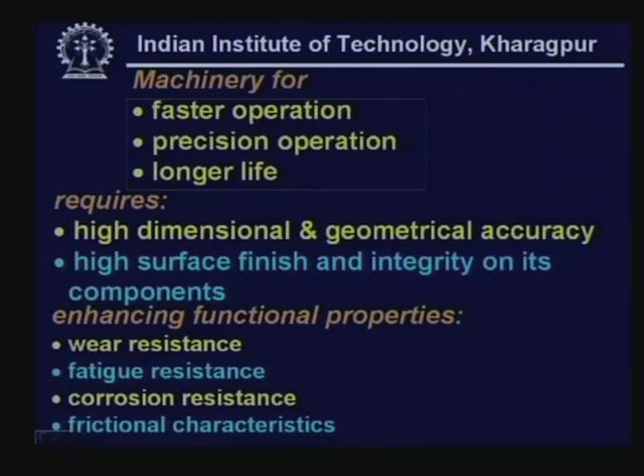To get this surface, the workpiece has to be processed, meaning removal of material in the form of chip. We know there are already existing processes like turning, shaping, milling, and grinding. Unfortunately, this stringent requirement of ultimate accuracy on dimension or profile, or very high level of finish, or enhanced surface integrity, just cannot be achieved by following these aforesaid processes.

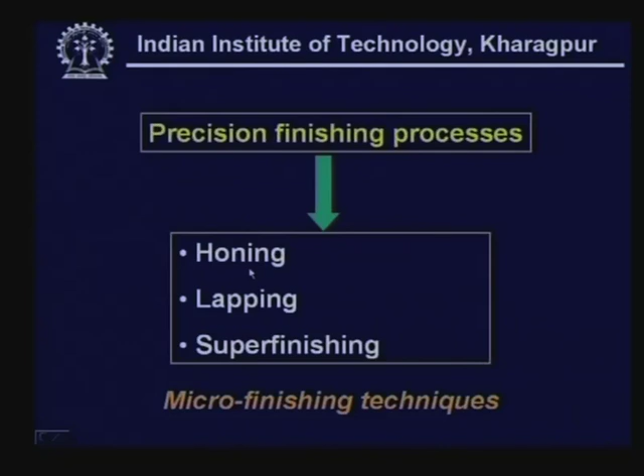That's why precision finishing processes came into being, which include honing, lapping, and superfinishing. These three, honing, lapping, and superfinishing, are also called the system of microfinishing techniques.

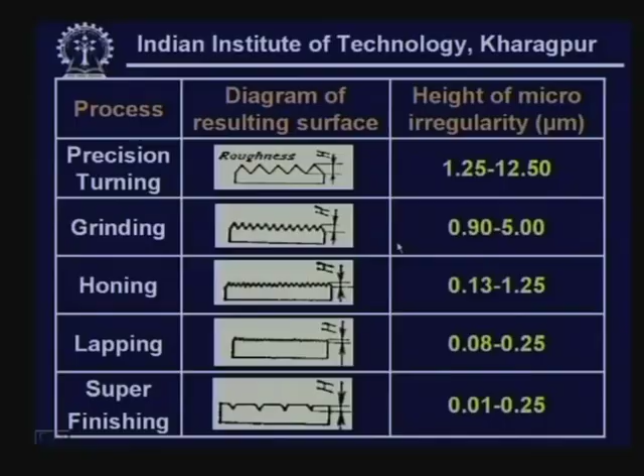Now, to have that, first comes the honing process.

This is the schematic representation of a honing process. As we know, in any material removal process, there should be an interaction between the workpiece and the cutting tool. Here we use a workpiece and are interested in improving the surface quality of the internal surface, and for that a tool is preferred in the form of a honing head, which consists of a number of abrasive sticks fixed to it. These abrasive sticks come in the form of bonded abrasive.

Here we have various motions to perform the honing action. Primarily, the honing head should rotate, and in addition it should also reciprocate along the axis of the hole. As a result, the desired surface is obtained.

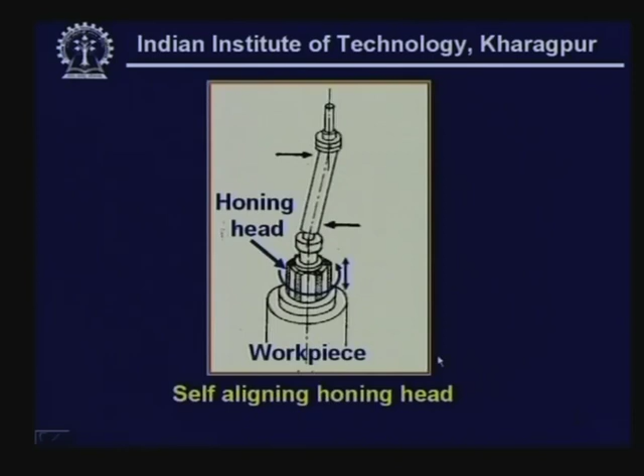Now, what are those characteristics of honing? It's basically a finishing or smoothing process.

The honing head has both rotary and reciprocating motion. This rotary motion is unidirectional. As a result, the track followed by the abrasive cutting points looks almost like a figure 8 - a closed loop travel path. The workpiece remains stationary with no movement, and bonded abrasive is used in this honing process.

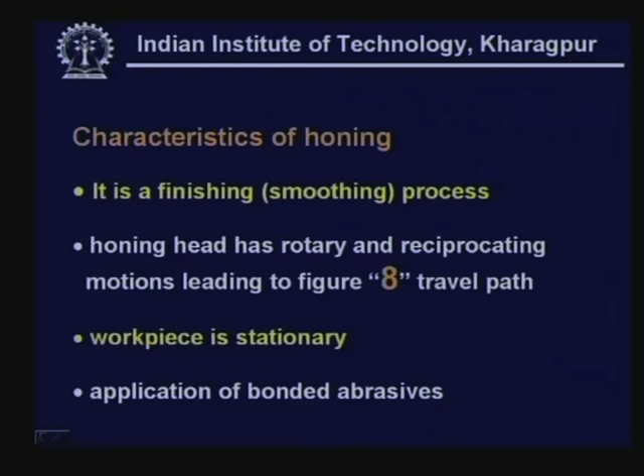Although we use abrasive grit, and it is an abrasive action, it is not similar to grinding - it's quite different from grinding. How? Let's look into this.

If we consider the grit density, at least 100 to 1000 times more grits are participating in this abrasive action in the honing head. Cutting speed is fairly low in honing, about 1/50th to 1/120th of the grinding speed. If we consider the cutting pressure required for chip formation, it's also 1/6 to 1/10 that of grinding. Considering these three characteristics makes it quite different from the grinding operation.

Now considering application, it's basically meant to improve the surface finish of a hole, and the size of the hole can range from 3 millimeters, which is quite low, to as high as 1000 millimeters.

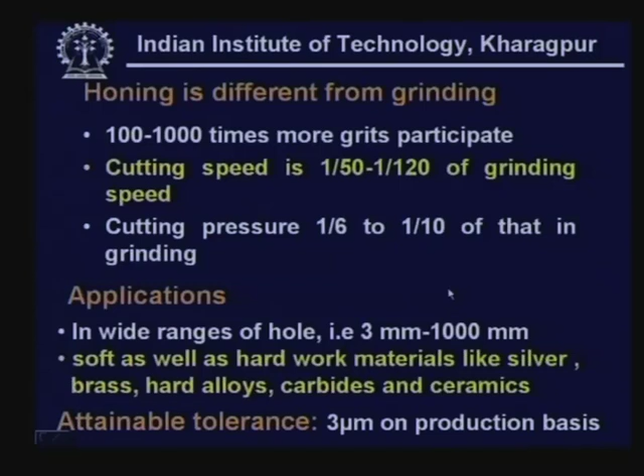Now the types of abrasive material play the most important role in this cutting action. Just like grinding, we have conventional abrasive and superabrasive, which can be readily used in making the abrasive stick, which constitutes the very vital element of the honing stone. On the conventional side we have aluminum oxide and silicon carbide, and on the superabrasive family, diamond and CBN. CBN is the new addition to this family.

Just like grinding, aluminum oxide is recommended for honing steel and ferrous material, and for non-ferrous material or non-metals in the softer range, silicon carbide can be recommended. Diamond is used for handling non-ferrous, very hard material where silicon carbide cannot be a good performing element.

CBN, as already said, is a new addition. With this CBN, hardened steel and various materials used for making components, such as alloy steels, can be very easily tackled.

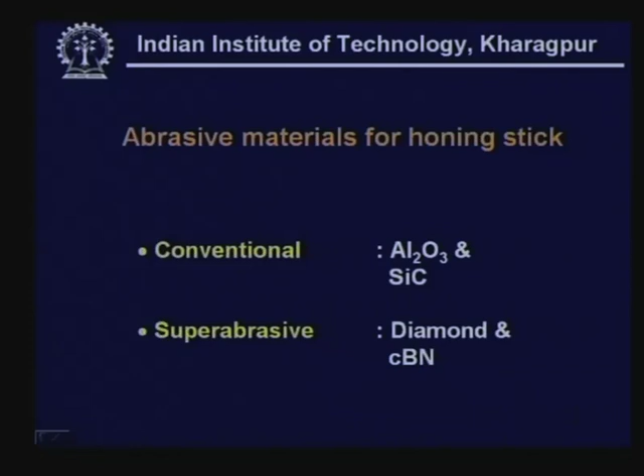Now here we see how the honing stick works within the hole. This is the initial position of the honing stick, and this is the final position over which it's reciprocating. So the stroke length has to be determined correctly.

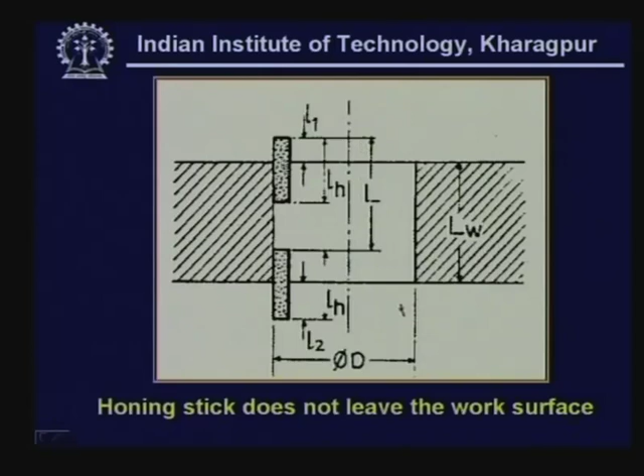One thing to note is that the honing stick should never leave the workpiece, either during the forward stroke or the reverse upward stroke. There should always be some overlapping or contact, and to achieve this properly, we have to consider the length of the stick, the length of the hole, and the overlap on the upper and lower sides. Considering all these parameters, the stroke length of the honing stick is determined.

Here we see clearly the path followed by the honing stone. It has a unidirectional rotation but a continuous reciprocating motion, producing a figure-8-like pattern on the hole made by previous processes, giving cross-hatch marks. These steps, determined by this offset and overlapping cuts, allow an improved surface finish to be effectively obtained in this honing process.

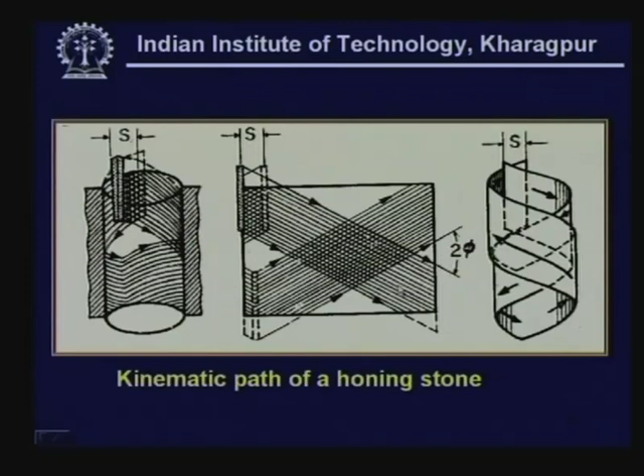Now we go to the operational parameters of honing. We find at least two parameters in honing. One is the peripheral honing speed of the honing stone, another is the unit pressure exerted on the surface to be honed. These are the two important parameters deciding the outcome.

What is our goal? At least we have two goals: one is the material removal rate, another more important one is the level of surface quality we can achieve from this honing process. We have to see the influence of this unit pressure and the peripheral velocity of the honing stick. Let us look into this graph.

Pressure along this axis, and we have material removal rate and also the surface roughness which develops because of this honing action. With the increase of pressure, we can increase the material removal rate. But over a certain range of pressure, the surface roughness is almost steady, and after that it takes a rise, a rising curve like this.

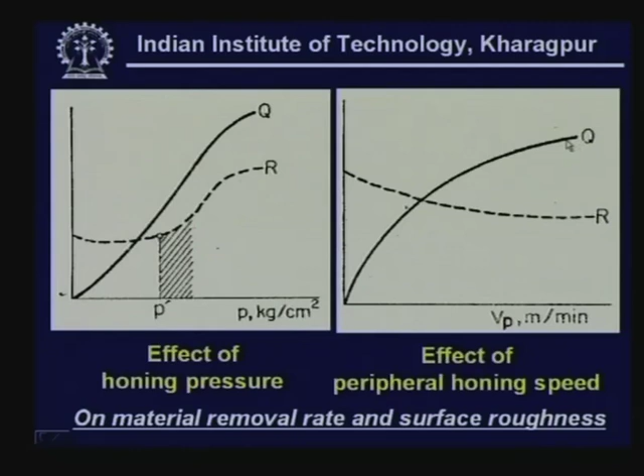If we go to the right hand side of this diagram, this shows the variation of material removal rate, and the dotted line shows the roughness. With increase of peripheral velocity, material removal rate can be increased, and we can also reduce the surface roughness. That means if this speed is permitted by the machine and its system, then by just increasing the speed we can achieve some improvement in surface finish - lowering of the surface roughness and increase of the material removal rate.

Now we have another parameter represented by tau, that means the honing time, which is very much connected with productivity. If we prolong this honing time, the material removal rate decreases for a constant unit pressure. This may be because of the dulling action of the grits - it gradually loses its cutting capability, and that's why it has a falling trend.

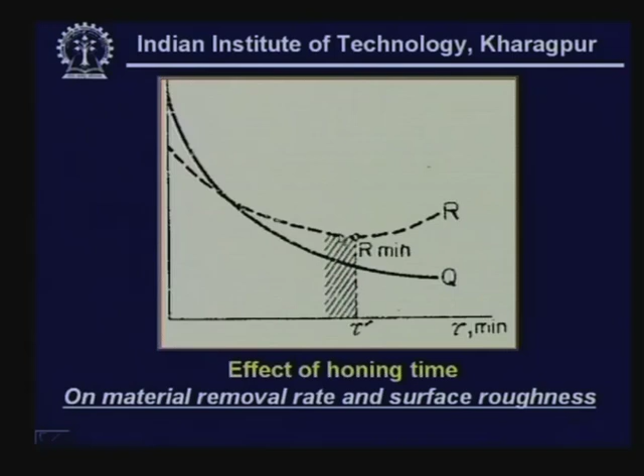But here we can find a minimum value of surface roughness, and then again it has an increasing trend. So we can say our goal is to achieve the desirable surface roughness, and we can leave it here - this should be the preferred honing time which satisfies the need of achieving the surface roughness.

Now, the honing we have discussed so far is multi-pass honing, meaning the tool is supposed to reciprocate for quite a number of times. But here we see a quite new type of honing stick. What we discussed so far is a bonded abrasive, but this is a composite structured bonded abrasive, meaning the abrasive grain and the bonding material make a composite structure. But the figure we see here is a special type of honing stick.

It is very similar to a single layer grinding wheel. Here the grits are formed in the configuration of a single layer which is bonded or embedded in a galvanic layer. What we achieve here is larger chip clearance space, and this honing stick can be safely used with increased material removal rate, which is not possible with a bonded stick having a composite structure. With such material we can go for higher material removal rate.

Following this idea, attempts can also be made to have a superabrasive honing stick with a single layer configuration, but here we can replace this galvanic bond with a brazed bond, because we already know that this brazed bond has a chemical attachment with the grit, and this brazed bond can provide much more chip clearance space, which reduces the risk of chip clogging during honing.

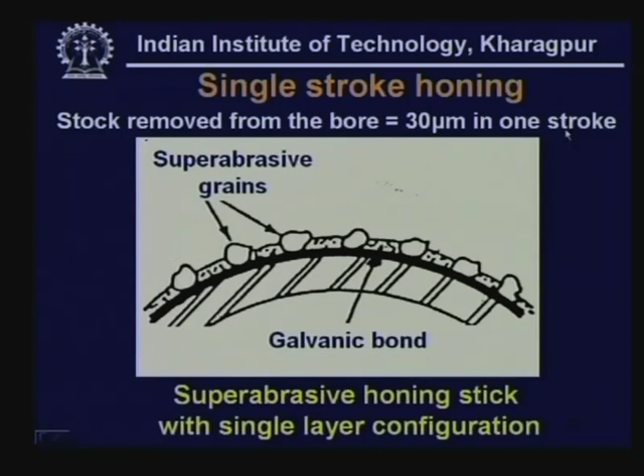So as we can see here, this honing stone can be used for high stock removal rate. For example, a 30 micron stock can be removed from a bore in one stroke. So this type of stick is used for single stroke operation.

Now we go to the lapping process. What we see here, instead of a bonded abrasive, loose abrasive are used. In honing we used bonded abrasive, but in lapping loose abrasive. These loose abrasives are carried by a vehicle which is in the form of oil or grease. They have momentary support from a top surface which is a piece of metal usually made of cast iron.

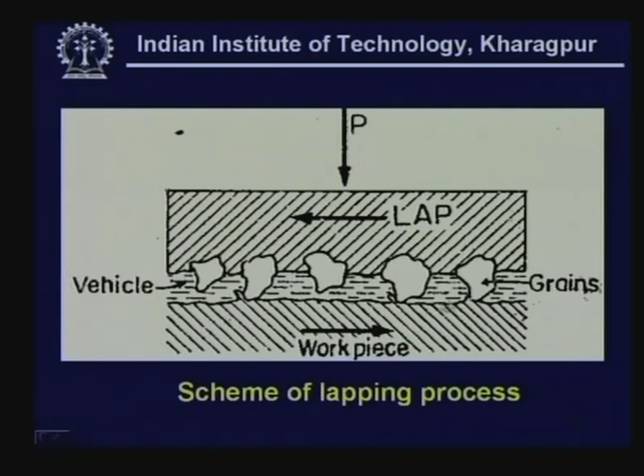What we see here is the workpiece which needs further improvement so far as surface quality is concerned. These grains are working like sharp cutting points, getting momentary support from the lap, which is the top component, a cast iron block. A pressure is exerted, and these grits are very active in forming tiny chips, getting the right surface finish on this workpiece.

So if we summarize the characteristics of the lapping process: number one, the use of loose abrasive between the lap and the workpiece. Then, the lap and workpiece are not positively driven. The relative motion between the lap and the workpiece changes continuously because they are not positively driven.

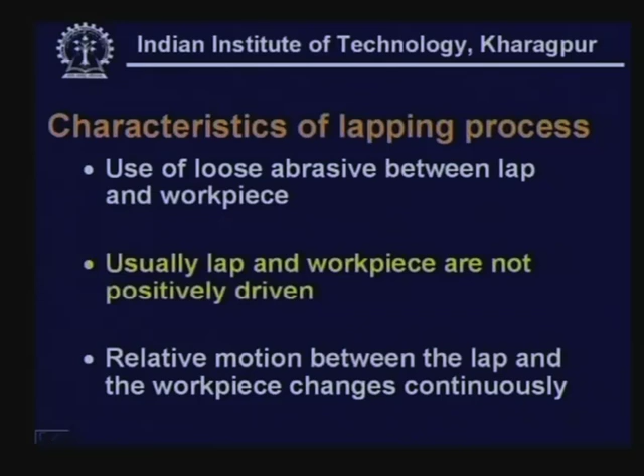So we have reviewed the characteristics of the lapping process. Then comes the abrasive used in this lapping operation. It is also an abrasive process using loose abrasive material. Here we can see aluminum oxide and silicon carbide - these are the two commonly used lapping materials.

Then what is added? Chromium oxide with finer grit size can also be used. Boron carbide, which cannot be used in any grinding operation or grinding wheel, can be effectively used in this lapping operation - the grain size is a little higher. Finally, we can also use diamond with a very fine grain size. So aluminum oxide, silicon carbide, chromium oxide, boron carbide and diamond - these are the usually used grit materials.

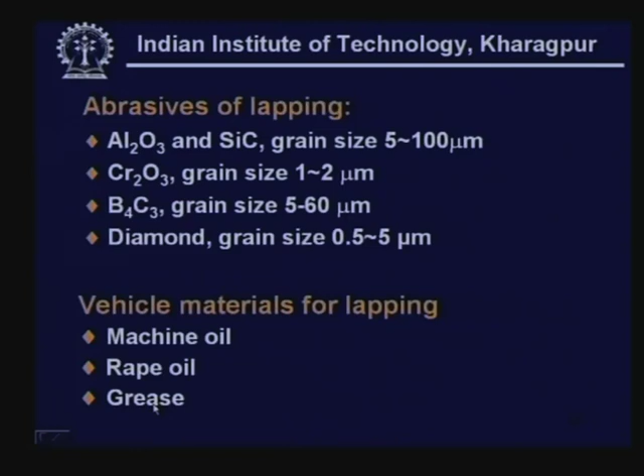Then the vehicle materials: machine oil, rapeseed oil and grease. These are the three materials which act like a transporter or carrier of these abrasive materials.

Here some illustrations are given of how lapping is conducted. There are actually two types of lapping: one is called manual lapping, another is called machine lapping. In manual lapping, what we can see is an example of external lapping of an external cylindrical surface, like a shaft.

This shaft can be held in a lathe and provided with the necessary rotary motion. Then a piece in the form of a bush comes and is fitted with this rotating cylindrical piece which needs lapping. In between this cylindrical ring and the solid piece to be lapped is added the lapping material. Now the pressure can be adjusted - what is known as the lapping pressure. To have the proper lapping action, there is an adjusting screw which can be tightened to achieve proper lapping pressure around this cylindrical surface.

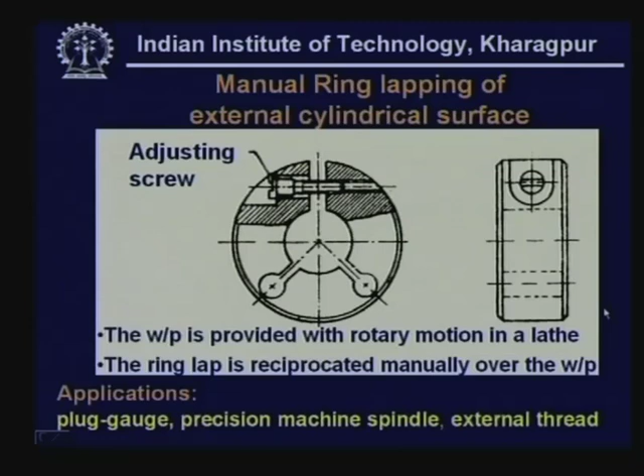Now we go to the internal cylindrical surface, like a bush or a liner, which also needs lapping. In this case, a mandrel is taken which serves as a lap - a solid piece which is held in a lathe and provided with the necessary rotation. This tube or sleeve, which needs lapping on the internal surface, is reciprocated manually over this mandrel along the axis, and in between, the lapping material or lapping medium is provided. This is how manual lapping of an internal surface is conducted.

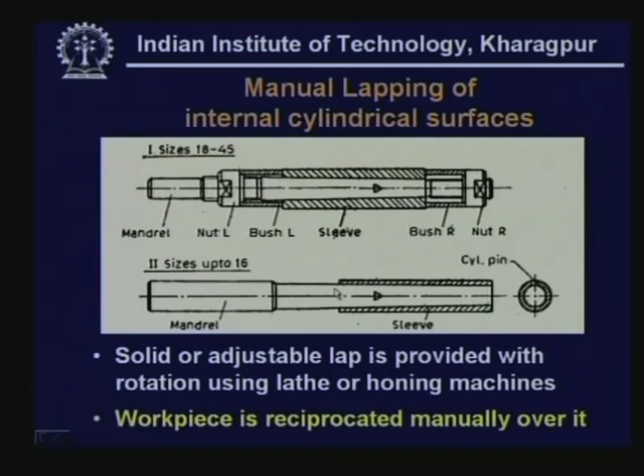We also have machine lapping. Now, when we have a large number of workpieces or a large amount of material to be removed, manual lapping becomes a tedious job. Then one has to go for machine lapping with the help of a machine, and this machine lapping facilitates economic production of the material by lapping.

Now, here what we can use is either loose abrasive, as has been already illustrated, with a suitable vehicle, or a bonded abrasive which is bonded onto a suitable plate, in the form of a plate or in certain other form, that can also be used.

Now, in this lapping machine family we have a classification. Machines which use a cast iron or a bonded abrasive circular plate - it can be a cast iron block which uses loose abrasive, or it can be a bonded abrasive circular plate used for either lapping a flat surface or a cylindrical surface. This is one category of the machine.

Now, for lapping cylindrical surfaces, we can use another type of machine which does not need any center support - this is centerless lapping, very similar to centerless grinding, and it is specifically meant for lapping of cylindrical surfaces. We have the third type which is meant for lapping internal surfaces, very similar to honing machines. So these are the three types of machines used in lapping.

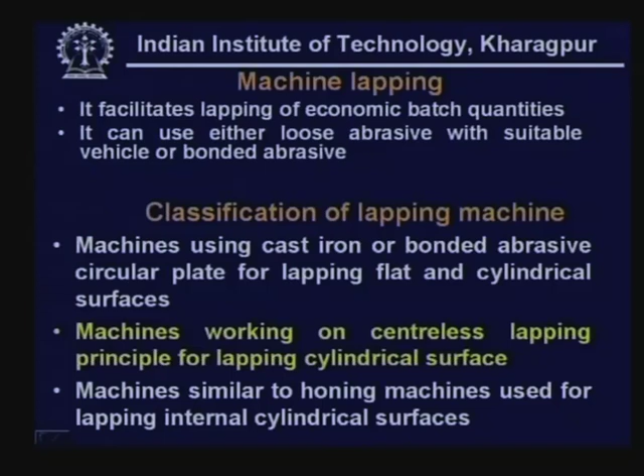This is an illustration where a lapping machine is used for production of either flat or cylindrical surfaces. The workpieces are put on this table support which is rotating; the lap, provided at the top, can be fitted with bonded abrasive and is also rotating. Now this should be correctly positioned to give the required pressure, and this pressure can be precisely controlled to achieve proper lapping action. So this is how flat surfaces can be lapped.

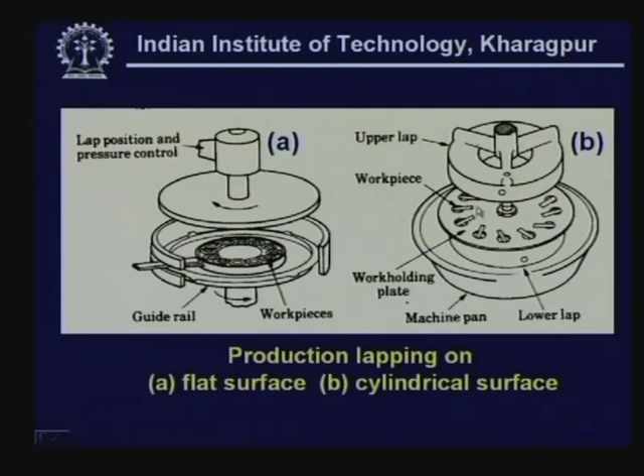A similar principle can also be used in another machine dedicated to lapping cylindrical pieces. Here too we have the work holding plate, the lower lap, the machine pan where debris will be collected, and the upper lap which does the necessary lapping. Here also a bonded abrasive plate at the bottom can be used to lap the cylindrical surface.

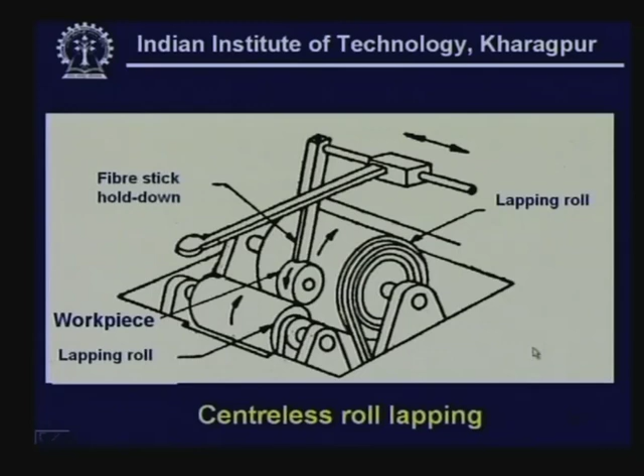Now we have to also look into the technical parameters affecting the lapping process. At least we can identify the unit pressure, just like the unit pressure which is a very important process parameter in honing. Then the grain size of the abrasives participating in this lapping action, the concentration of abrasive in the vehicle - for example, in a unit volume, how much volume is occupied by this abrasive grit - and ultimately the lapping speed. So these are the four process parameters controlling the lapping process.

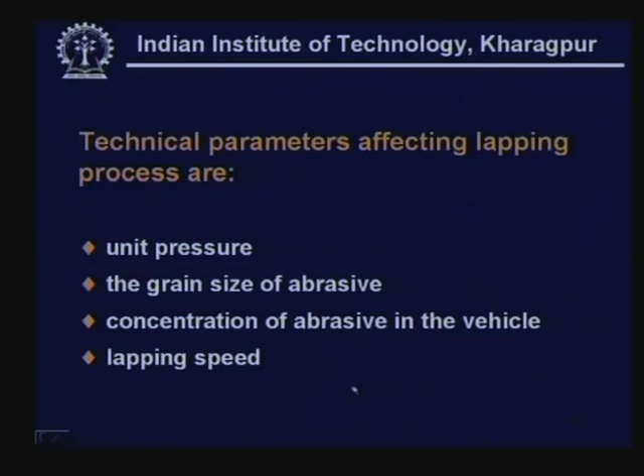So at least we can find there is some effect of this abrasive content in the vehicle, which is expressed in the form of percentage - that means how much abrasive material is contained in the vehicle - and on the axis we have material removal rate, which is also of interest. We have seen three pressures P1, P2, P3, and suppose it is P1. With this constant P1 value, as abrasive content changes, we can easily see that material removal rate is gradually increasing and then has a falling trend. Now if we change the pressure, the whole curve can shift and change its position.

If we go to another pressure, we can see that it also has certain variation. What is interesting is that for each pressure we can have a maximum material removal rate, which is not constant for all pressures. So for P1 here we have the peak, and for P3 the peak is indicated here. Now if we consider all three pressures, we find P2 is the best one, the pressure which should be chosen, and this corresponds to a particular abrasive content which is not the same for P3 or P1.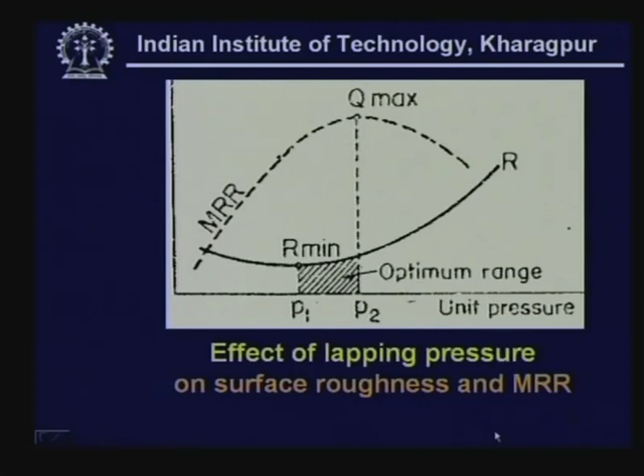With increase of grain size, this continuously increases, just like any abrasive process. However, the material removal rate has a rising tendency, and after attaining a maximum it has a falling trend.

But from the requirement of achieving the surface roughness that satisfies the quality needs of the component to be machined or produced, there is a fixed surface roughness, fixed considering the effective functioning of the component. There we cannot make any compromise.

So this is the value which is fixed. With this value we have to choose the grain size, the best possible grain size where we can have the right value of surface roughness.

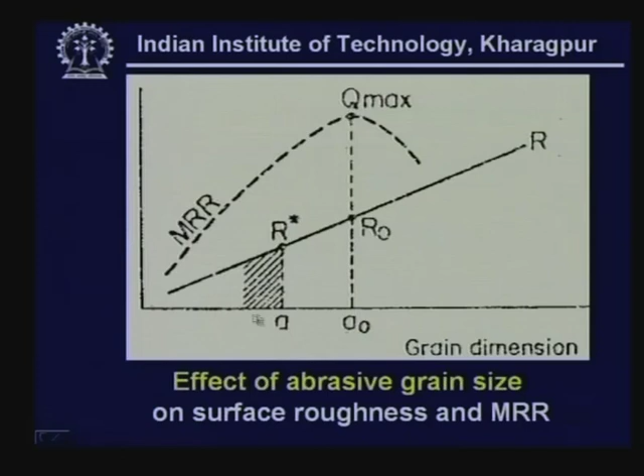But if any adjustment or flexibility is allowed, so that we can let the surface roughness increase to attain the highest value of material removal rate, then perhaps we can go to a higher grain size.

Then comes the lapping time, its influence on material removal rate and surface roughness. As we know, since the abrasive grits are being used continuously, they will show dullness, loss of sharpness, and with the same constant pressure, the material removal rate will fall because of the loss of cutting capability.

But this also enhances surface finish, or reduces surface roughness. Both can be achieved by prolonging the lapping action over a period of time.

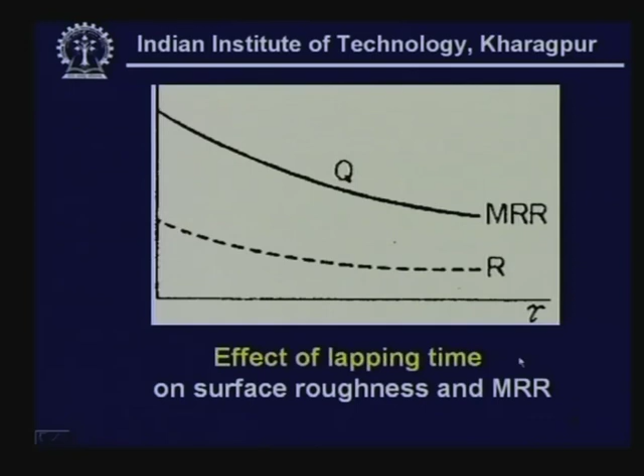Now we have to choose the lapping time. There are two important issues. One is L. What is L? L is actually the linear loss of dimension, which also has a fixed value, what we can consider as the allowance.

Gradually, as lapping continues, material is removed and there is a loss of material. This loss has a limited value; we cannot go beyond that. At the same time, we have to achieve the fixed surface roughness.

If we can achieve the surface roughness at a time tau r well before reaching the limit in terms of this allowance, then we choose tau r as the criteria for choosing the lapping time. It can be the other way: it may so happen that a very low roughness value is chosen, and this cannot be achieved over a reasonable period of time, and it takes quite longer.

We can compare these two curves. Here the lapping time is longer to achieve a lower value of surface roughness, but this LP, that is the permissible limit on the material loss, we cannot go beyond that point. So this tau r cannot be allowed, lapping cannot be allowed over this tau r.

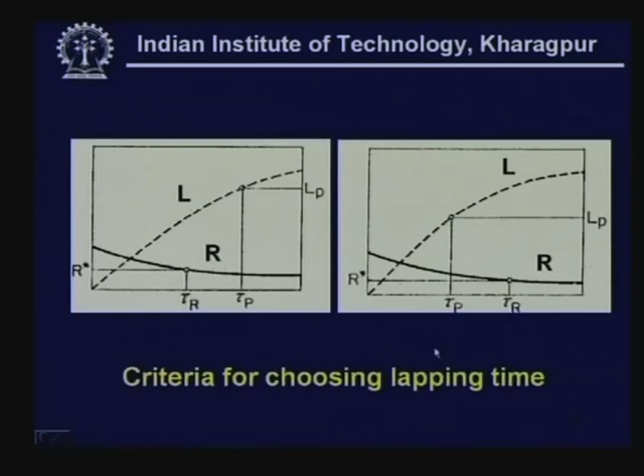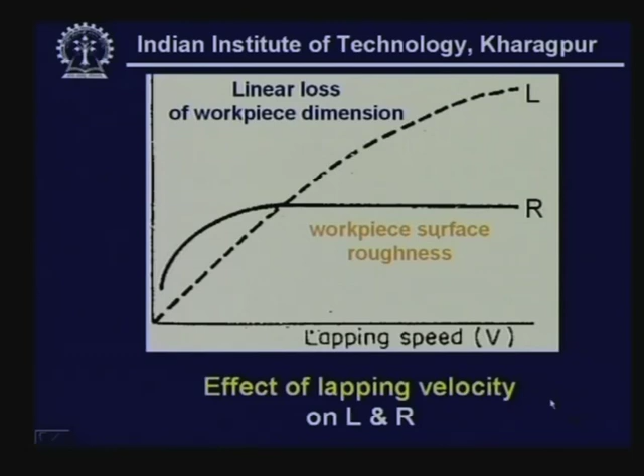Now we go to the superfinishing operation. What is meant by superfinishing? This superfinishing is somewhat very similar to honing. However, there are certain differences with respect to honing. Number one, in case of honing, we have a longer stroke which covers the entire length of the workpiece.

But in this case, we have a short stroke. It is not a longer stroke, it is a very short stroke, and it is very rapid. That means the frequency of oscillation is very high compared to honing. Then, compared to honing, this has a low cutting speed and a low cutting pressure, and as a result, rise of temperature during this superfinishing process is well within the limit, and that protects the quality of the job.

Because of this high frequency operation, the bonded abrasive stick engaged in this superfinishing operation does not suffer from chip clogging, because chip is produced and that may accommodate within the intergrit spacing, but because of this rapid oscillation, the chips are thrown out or evacuated from that chip evacuation space.

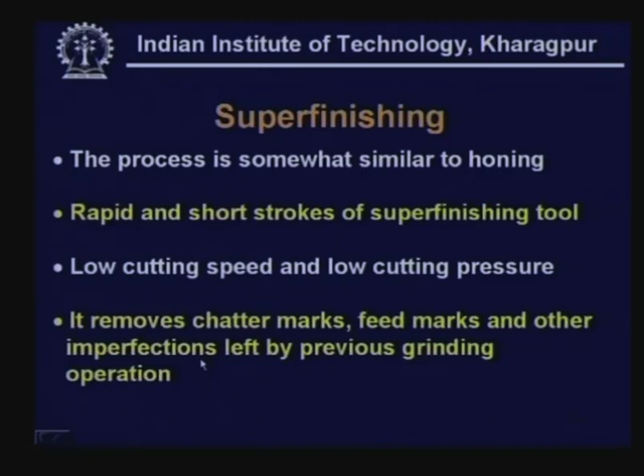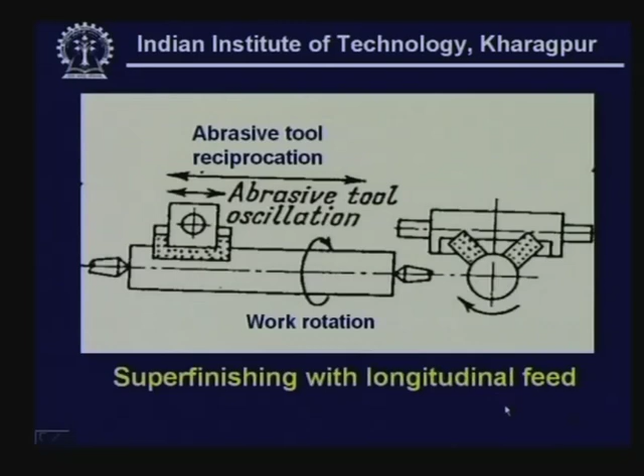We have another example where this superfinishing can be conducted in the plunge cut mode. Here this abrasive stick has an oscillation, but it does not have any reciprocation. Only a feeding is given in the radial direction, and it is doing the necessary superfinishing operation.

This illustration shows how this superfinishing can be extended over the end face of a circular plate. This oscillation is carried out in the radial direction while the surface plate is also rotating, and a feed is given in the radial direction.

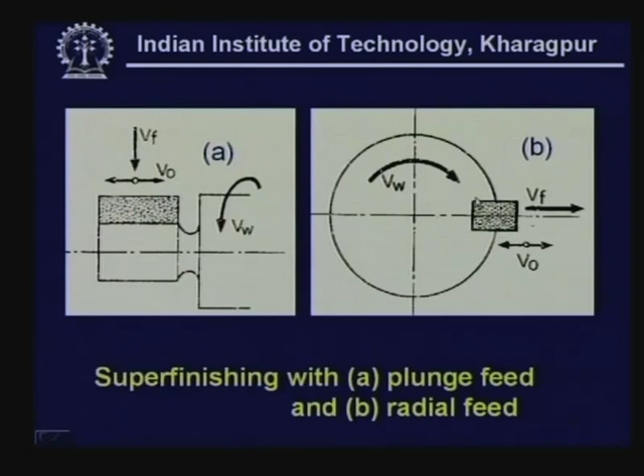This is another example of a superfinishing operation where the workpiece is stationary. Unlike what we have seen so far, here the abrasive tool's outer surface is continuously rotating while an oscillatory motion is also provided. This abrasive section is arranged over a head, and over this peripheral surface, the oscillation combined with rotation produces the superfinished surface.

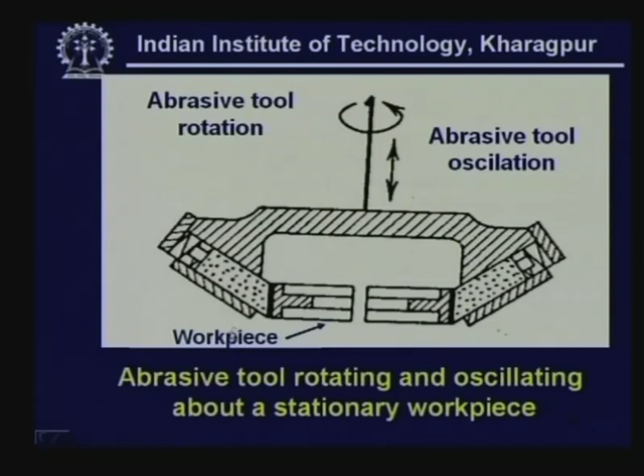These two motions are combined over a stationary workpiece. This is one example where we have oscillatory motion of the abrasive tool, which can be carried out to achieve superfinishing action on an internal surface.

We have oscillatory action on the abrasive tool, rotation of the job, and reciprocation over the entire length. When these three motions are combined, we get this superfinishing action on the internal surface.

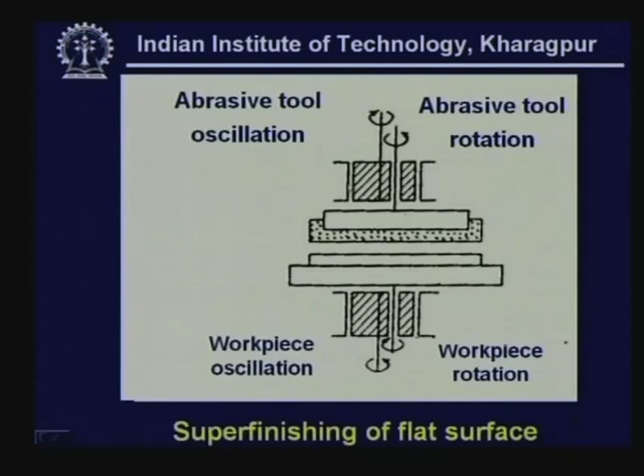This is the abrasive tool in action, performing superfinishing over a flat surface. Here, oscillatory motion is provided both on the workpiece and on the abrasive tool through eccentric rotation. It has one axis which gives the rotation, and the oscillation is provided by some eccentricity.

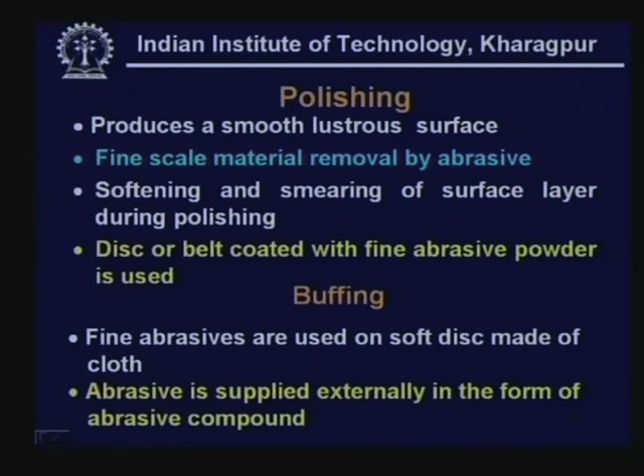We have mechanical polishing, which uses a polishing cloth through mechanical rubbing. This polishing is done by softening and smearing of the surface. Buffing is just an extension of polishing, using a finer cloth disc with finer grit. So these two are actually mechanical actions.

This is electropolishing, quite different from mechanical action. It is just the reverse of electroplating. By electrochemical dissolution over the workpiece, a mirror finish can be obtained on the metal surface. It is advantageous in that the high points are preferentially attacked by this electrochemical action, allowing a smoother surface to be obtained rather quickly.

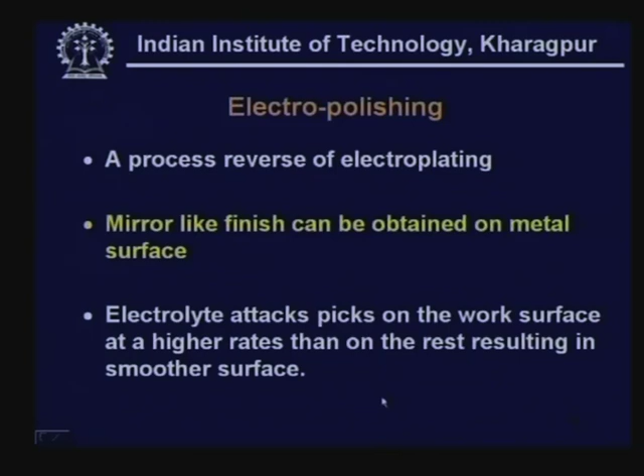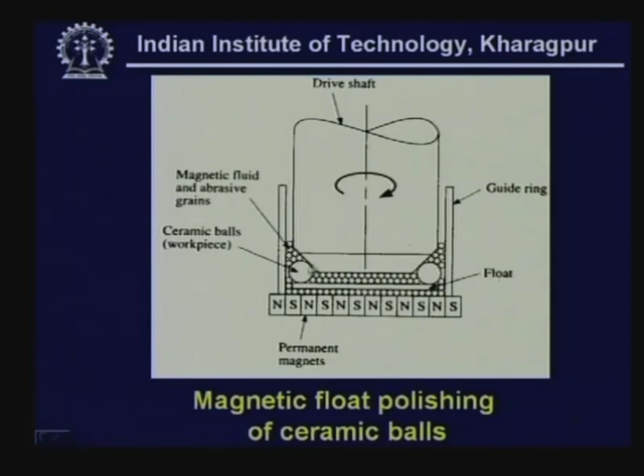This is called magnetic float polishing of ceramic balls. Here we can see these ceramic balls need some superfinishing, and within this chamber we have a magnetic fluid and abrasive grains, supported by this magnetic force. The balls are held between the float on one side and the rotating shaft on the other. Both rotate, and through this ceramic float, the balls are abraded by the abrasive grains.

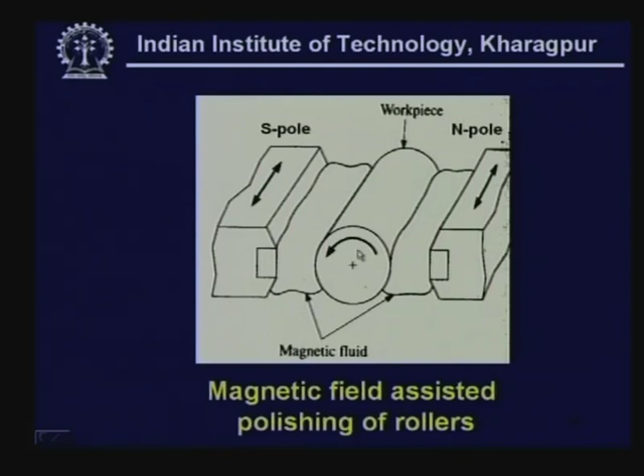Now we go to the ball burnishing process. It is actually a smearing operation whereby plastic deformation creates improvement in surface integrity. We can induce residual compressive stress, enhance surface hardness thereby increasing wear resistance, improve fatigue resistance of the material, and surface finish can also be fairly improved.

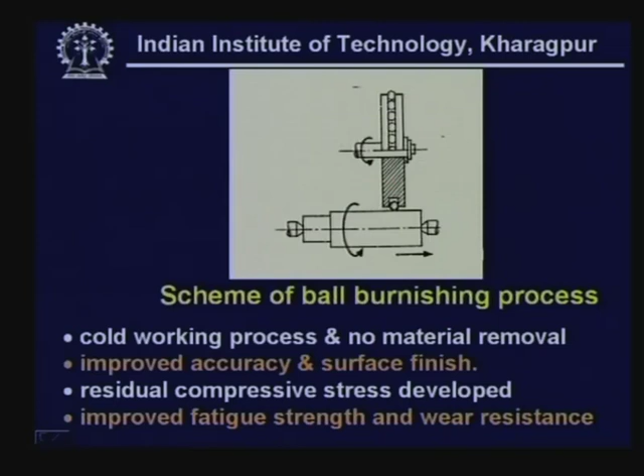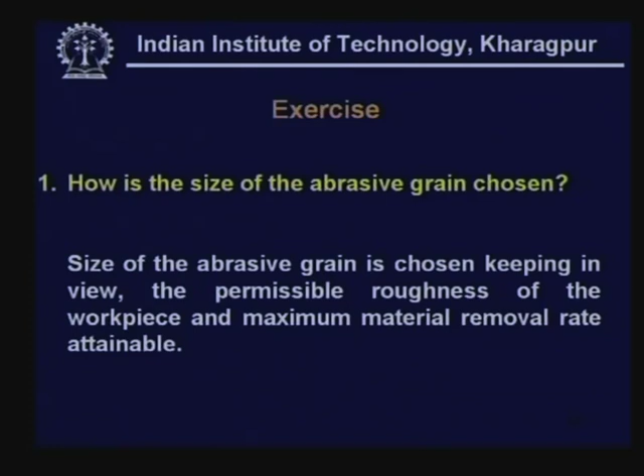There are certain questions on how the size of the abrasive grain is chosen in the lapping process. The abrasive grain is chosen keeping in view the permissible surface roughness and the maximum material removal rate which can be attained.

CBN can also be used in honing sticks in single layer formation. It can come as a bonded abrasive in the form of a galvanically bonded abrasive stick, which can be used for this action. It is for honing action.

How does superfinishing differ from honing? Superfinishing is in some way very close to honing, but it has oscillation over a short length at high frequency, the cutting pressure is much lower, and the rotating speed is also much lower compared to honing.

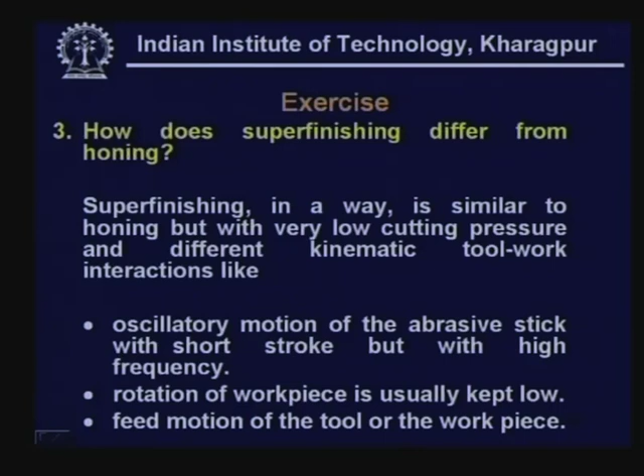Electropolishing has an advantage over mechanical polishing in that the high points can be very easily attacked by this anodic action, thereby material removal is facilitated and high finish can be obtained rather quickly.

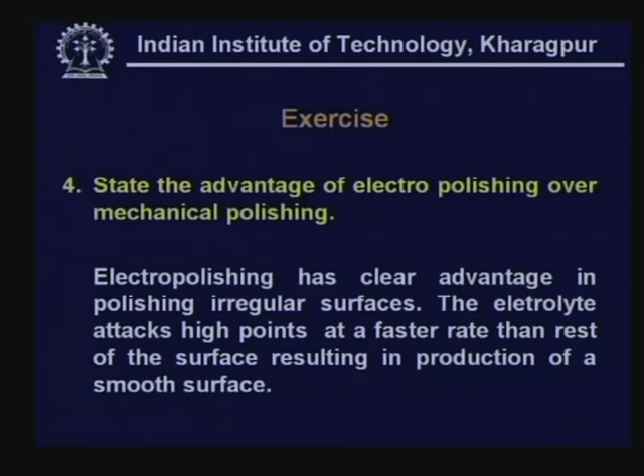How is surface quality improved in ball burnishing? A hardened steel ball is used for improving the surface integrity of the workpiece. By this rolling action, material is not removed, but there is a smearing action. This sizably improves surface finish, but more importantly, it induces compressive stress on the surface, which translates into enhanced resistance to fatigue during alternating stress.